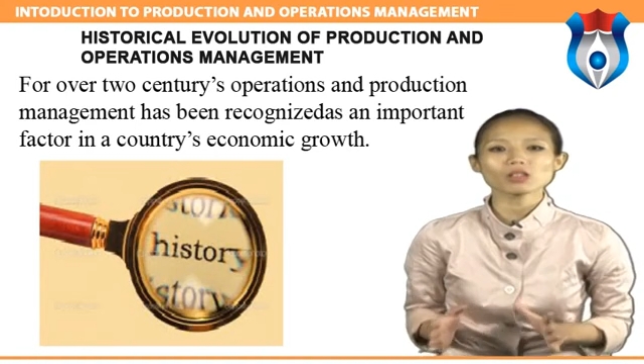In the early 20th century, F.W. Taylor implemented Smith's theories and developed scientific management. Workers were studied in great detail to eliminate wasteful efforts and achieve greater efficiency. At the same time, psychologists, sociologists, and other social scientists began to study people and human behavior in the working environment. In addition, economists, mathematicians, and computer scientists contributed newer, more sophisticated analytical approaches.

With the 1970s emerged two distinct changes in our views. The most obvious, reflected in the new name operation management, was a shift between the service and manufacturing sectors of the economy. As the service sector became more prominent, the change from production to operations emphasized the broadening of our field to service organizations. The second, more subtle change was the beginning of an emphasis on synthesis rather than just analysis in management practices.

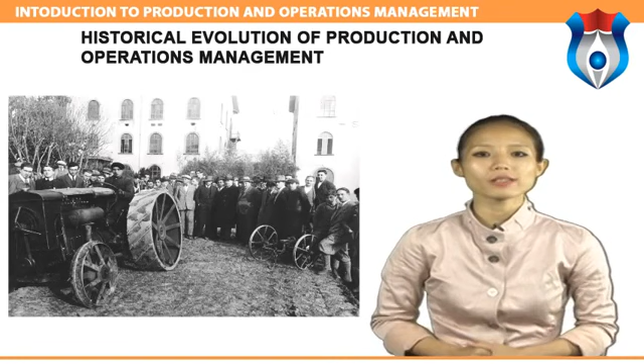Now moving on to the next topic, we will study the concept of production. Production function is that part of an organization which is concerned with the transformation of a range of inputs into the required outputs, products, having their requisite quality level. Production is defined as a step-by-step conversion of one form of material into another through chemical or mechanical process, to create or enhance the utility of the product to the user.

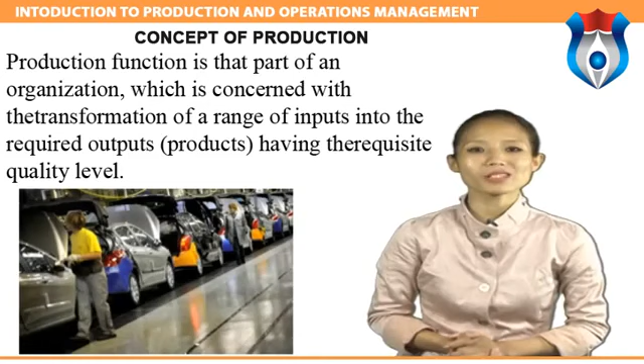This production is a value addition process. At each stage of processing, there will be value addition. Classification of production system: production systems can be classified as job shop, batch, mass, and continuous production systems.

Job shop production is characterized by manufacturing one or few quantities of products designed and produced as per the specifications of customers within a prefixed time and cost. The distinguishing feature of this is low volume and high variety of products. A job shop comprises general purpose machines arranged into different departments. Each job demands unique technological requirements and processing on machines in a certain sequence.

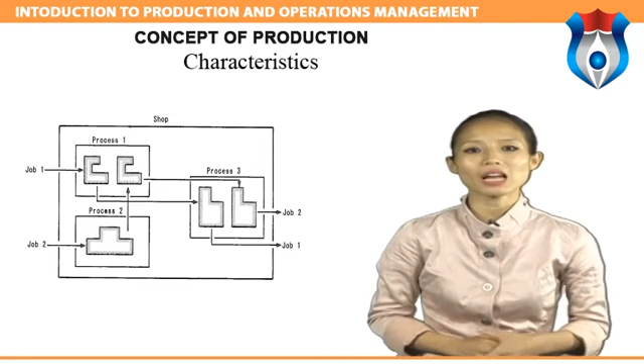The job shop production system is followed when there is high variety of products and low volume, use of general purpose machines and facilities, highly skilled operators who can take up each job as a challenge because of its uniqueness, and large inventory of materials, tools, and parts. Detailed planning is essential for sequencing the requirements of each product, capacities for each work center, and other priorities. Now let's look at the advantages of job shop production.

Because of general purpose machines and facilities, a variety of products can be produced. Operators will become more skilled and competent as each job gives them learning opportunities. Full potential of operators can be utilized, and opportunities exist for creative methods and innovative ideas.

Now let's look at the limitations of job shop production: higher cost due to frequent setup changes, higher level of inventory at all levels and hence higher inventory costs, complicated production planning, and larger space requirements.

Batch production is defined by the American Production and Inventory Control Society (APICS) as a form of manufacturing in which the job passes through the functional departments in lots or batches, and each lot may have a different routing.

It is characterized by the manufacture of a limited number of products produced at regular intervals and stocked awaiting sales. Batch production is used when there are shorter production runs, when plant and machinery are flexible, when the setup used for producing items in a batch requires change for processing the next batch, and when manufacturing lead time and costs are lower compared to job order production.

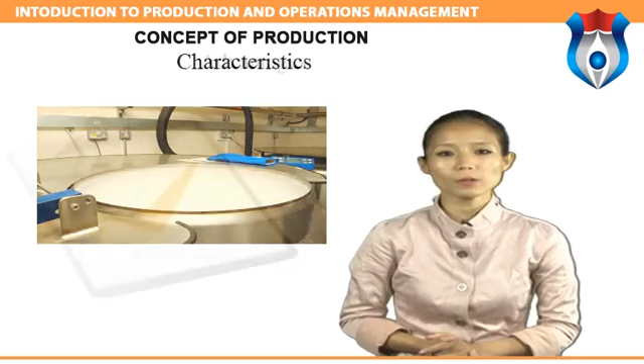The advantages of batch production are better utilization of plant and machinery, promotion of functional specialization, lower cost per unit compared to job order production, lower investment in plant and machinery, flexibility to accommodate and process a number of products, and better job satisfaction for operators.

Let's look at the limitations of batch production. Material handling is complex because of irregular and longer flows. Production planning and control is complex. Work in process inventory is higher compared to continuous production.

Mass production is the manufacture of discrete parts or assemblies using a continuous process. This production system is justified by a very large volume of production. The machines are arranged in a line or product layout. Product and process standardization exists, and all outputs follow the same path.

Mass production is used under the following circumstances: standardization of product and process sequence, dedicated special purpose machines having higher production capacities and output rates, large volume of products, shorter cycle time of production, lower in-process inventory, and perfectly balanced production lines.

The advantages of mass production are a higher rate of production with reduced cycle time, higher capacity utilization due to line balancing, and less skilled operators are required.

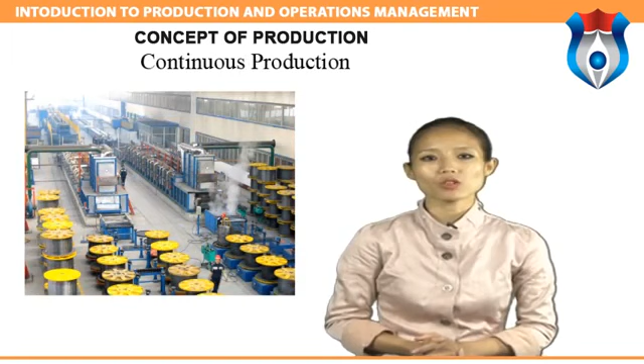Continuous production. Production facilities are arranged as per the sequence of production operations from the first operation to the finished product. Items flow through the sequence of operations using material handling devices such as conveyors and transfer devices. Continuous production is used under the following circumstances: dedicated plant and equipment with zero flexibility, fully automated material handling, a process that follows a predetermined sequence of operations, and component materials that cannot be readily identified with the final product.

The advantages of continuous production are: standardization of product and process sequence, a higher rate of production that reduces cycle time, higher capacity utilization due to line balancing, and manpower is not required for material handling as it is completely automatic.

The limitations of continuous production are: flexibility to accommodate and process a number of products does not exist, there is very high investment for setting up flow lines, and product differentiation is limited.

Now we will discuss the nature and scope of operation management. Operation management is often used along with production management in literature on the subject, so it is useful to understand its nature. Operation management is understood as a process whereby resources or inputs are converted into more useful products. A second reading of this reveals there is hardly any difference between the terms production management and operation management.

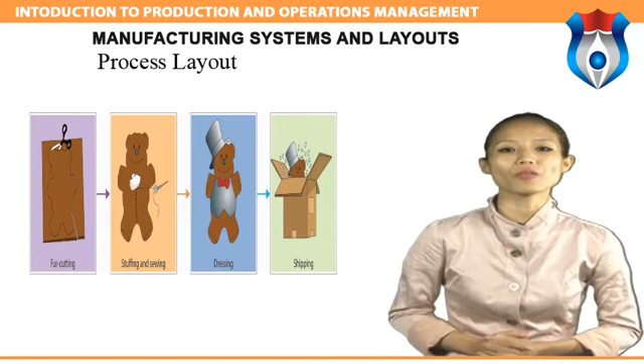Process layout. Process layouts are found primarily in job shops or firms that produce customized, low-volume products that may require different processing requirements and sequences of operations. Process layouts are facility configurations in which operations of a similar nature or function are grouped together. Improving process layout involves the minimization of transportation cost, distance or time. To accomplish this, some firms use what is known as a from-to chart, where subjective information is summarized on a grid displaying various combinations of department, work group or machine pairs.

Advantages of process layout include flexibility. The firm has the ability to handle a variety of process requirements.

Cost: the general purpose equipment utilized may be less costly to purchase and easier to maintain than specialized equipment. Motivation: employees in this type of layout will probably be able to perform a variety of tasks on multiple machines, as opposed to the boredom of performing a repetitive task on an assembly line.

Cost: if batch processing is used, in-process inventory costs could be high. Lower volume means higher per unit cost. More specialized attention is necessary for both products and customers. Confusion: constantly changing schedules and routines make juggling process requirements more difficult.

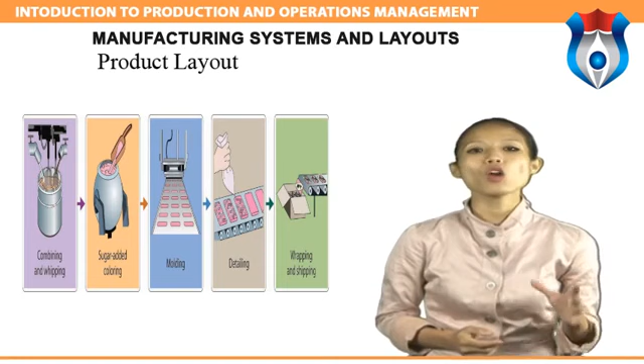Product layout. Product layouts are found in flow shops, repetitive assembly, and process or continuous flow industries. Flow shops produce high volume, highly standardized products that require highly standardized, repetitive processes. Two types of lines are used in product layouts: paced and unpaced.

Paced lines can use some sort of conveyor that moves output along at a continuous rate so that workers can perform operations on the product as it goes by. For longer operating times, the worker may move alongside the product until he or she is finished, then walk back to the workstation to begin working on another part. This essentially is how automobile manufacturing works.

Product layout efficiency is often enhanced through the use of line balancing. Advantages of product layouts include output: product layouts can generate a large volume of products in a short time. Cost: unit cost is low as a result of the high volume.

Labor specialization results in reduced training time and cost. A wider span of supervision also reduces labor costs. Accounting, purchasing, and inventory control are routine, because the route is fixed, less attention is required. Utilization: there is a high degree of labor and equipment utilization.

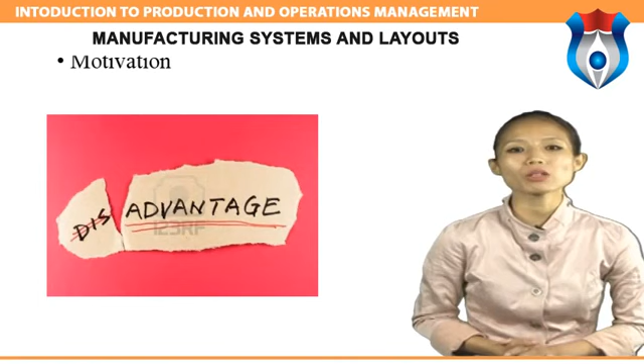Disadvantages of product layout include motivation: the system's inherent division of labor can result in dull, repetitive jobs that can prove to be quite stressful. Also, assembly line layouts make it very hard to administer individual incentive plans. Flexibility: product layouts are inflexible and cannot easily respond to required system changes, especially changes in product or process design.

Fixed position layout. A fixed position layout is appropriate for a product that is too large or too heavy to move, for example, naval ships are not produced on an assembly line. Services may also dictate the fixed position, for example, a hospital operating room where doctors, nurses, and medical equipment are brought to the patient.

Other fixed position layout examples include construction, such as buildings, dams, and electric or nuclear power plants, shipbuilding, aircraft, aerospace, farming, drilling for oil, home repair, and automated car washes.

Combination layouts. Many situations call for a mixture of the three main layout types. These mixtures are commonly called combination or hybrid layouts. For example, one firm may utilize process layout for the majority of its process along with an assembly line in one area. Cellular layout: cellular manufacturing is a type of layout where machines are grouped according to the process requirements for a set of similar items, part families that require similar processing.

These groups are called cells. Therefore, a cellular layout is an equipment layout configured to support cellular manufacturing. Workers in cellular layouts are cross-trained so that they can operate all the equipment within the cell and take responsibility for its output. Other layouts: in addition to the aforementioned layouts, there are others that are more appropriate for use in service organizations.

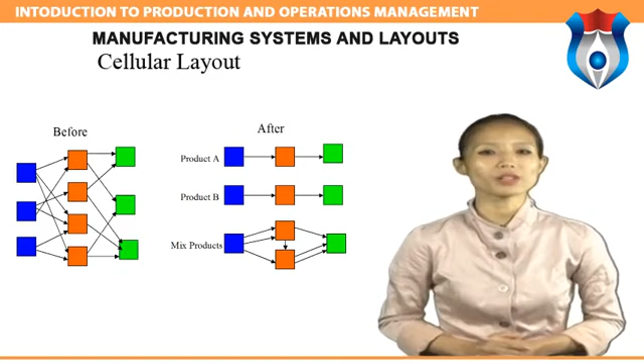These include warehouse or storage layouts, retail layouts, and office layouts. With warehouse or storage layouts, order frequency is a key factor. Items that are ordered frequently should be placed close together near the entrance of the facility, while those ordered less frequently remain in the rear of the facility.

Now we will study the significance and systematic view of operation. A system is a group of interrelated items in which no item studied in isolation will act in the same way as it would in the system.

A system is divided into a series of parts or subsystems, and any system is a part of a larger system. Systematic view of operation.

The system boundary defines what is inside the system and what is outside. A system environment is everything outside the system boundary that may have an impact on the behavior of the system. A system's inputs are the physical objects or information that enter it from the environment, and its outputs are the same which leave it for the environment.

The operation system is concerned with converting the transformed resources from inputs into outputs in the form of goods and services. There are three main types of transformed resources: materials, which can be transformed either physically, example manufacturing; by location, example transportation; by ownership, example retail; or by storage, example warehousing, or other private services and government services. Significance of operation management.

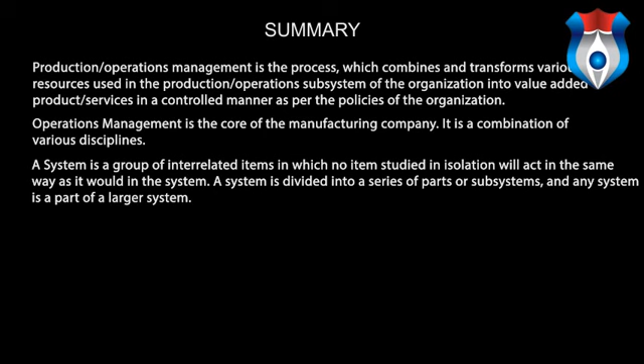Productivity, the ratio of output to input, is a measure of a manager's or an employee's efficiency in using the organization's scarce resources to produce goods and services. Operation management refers to the complex set of management activities involved in planning, organizing, leading, and controlling an organization's operations.